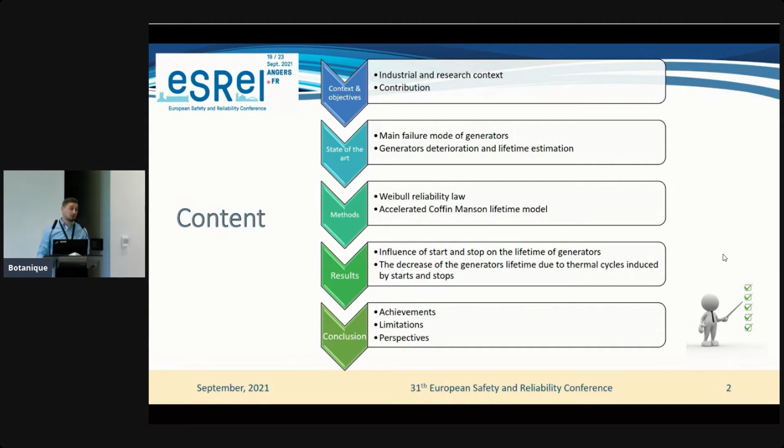So the industrial context: why we study the effect of cycling. Due to the deregulation of the energy market in Europe, the hydropower equipment started to have an increased number of starts and stops, because renewable energy had to be integrated on the electrical network. So the operators need to adapt to the new operating constraints. This might lead to reduced lifetime of the equipment and, in the end, additional costs that need to be evaluated.

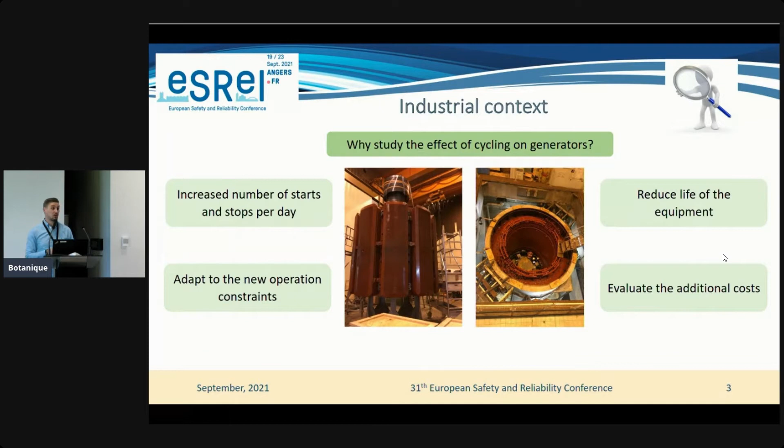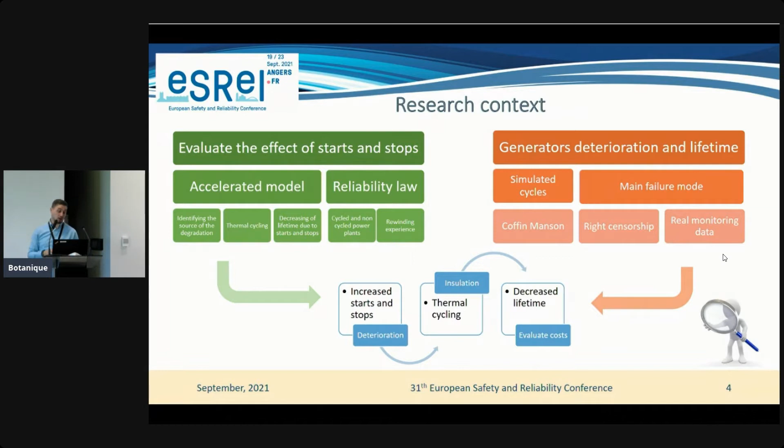A few words about the contribution. We evaluate the effect of start and stop. First of all, we analyze all the subcomponents of generators, and then we identify the degradation phenomena. That was the first step, and then we propose two studies to estimate the decrease in lifetime. We have two categories, and we use the rewinding experience with right censorship. We try to model it after with an accelerated lifetime model, and we do two types of simulation.

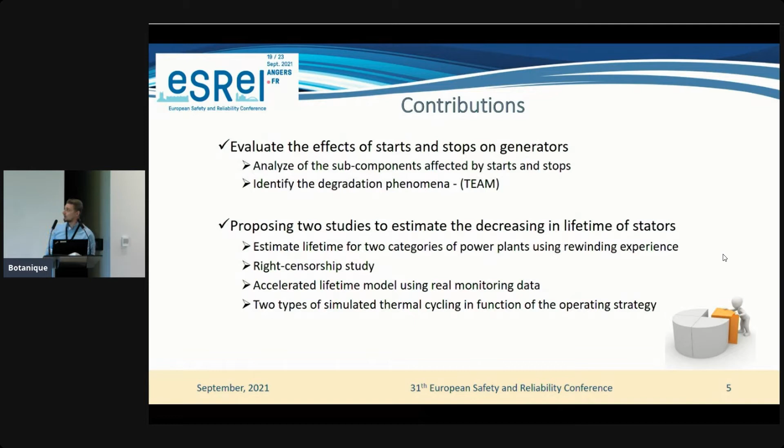So briefly, the two methods. First, the reliability law. We use real data on rewinding years, and we also use right censorship. We will discuss after exactly what right censorship means. And then we estimate the lifetime of two types of hydropower plants, which we call cycled and non-cycled hydropower plants.

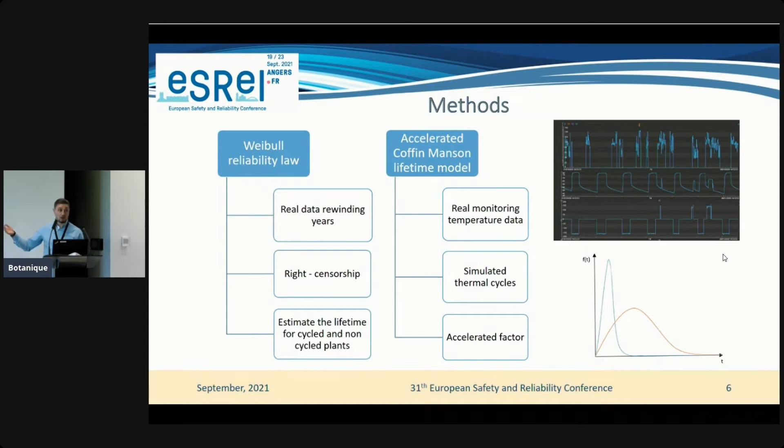So once we see the effect of the start and stop, we try to model it, and we model it with real monitoring temperature data. We simulate some thermal cycles, and in the end, we estimate an acceleration factor. In the next slides, I will explain exactly the two types of methods.

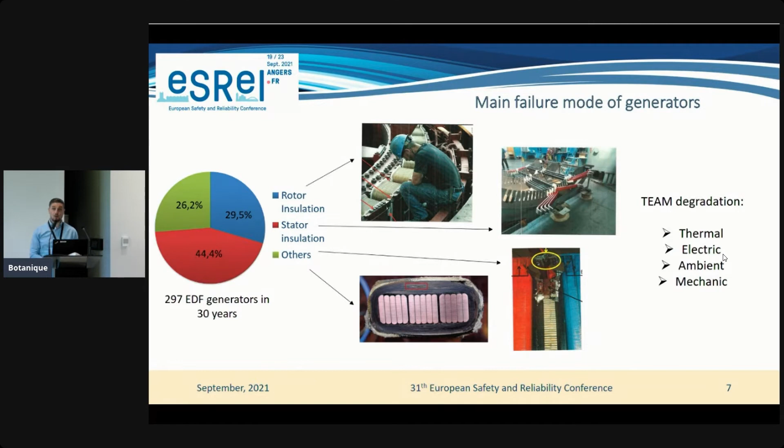So in the beginning, we did a study on almost 300 EDF generators over the past 30 years, and we saw that the main defaults are related to stator insulation. Half of them are related to stator insulation. There are also defaults related to rotor insulation and other types of defaults. We call this TEAM degradation, meaning thermal, electric, ambient, and mechanical. For the stator insulation, the thermal degradation is the most important one, and we try to model it.

So with the first method, we use a Weibull reliability law with two parameters, alpha and beta, and we make two groups. The first group is called low cycle plants, where we have run-of-river plants, with an average of one cycle or less per day. In the second group, we have the high cycle plants, with an average of 2 or more cycles per day. This is the average over the whole life, not what they do every day. Sometimes the high cycle plants do more than 2 cycles per day. So we have almost 300 generators that are low cycled, and almost 43 high cycled plants.

Why do we use right censorship? Because there are generators that are still functioning now. There are hydropower plants that were commissioned in the early 20th century, so they are more than 100 years old. Some of them were replaced, some of them are still functioning. So we use right censorship to model it.

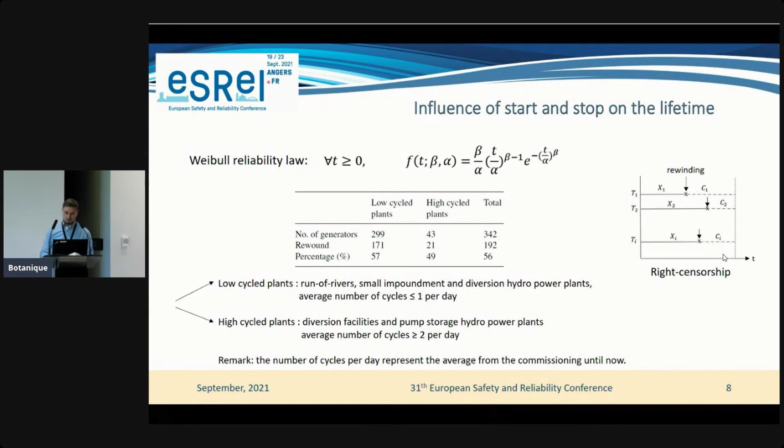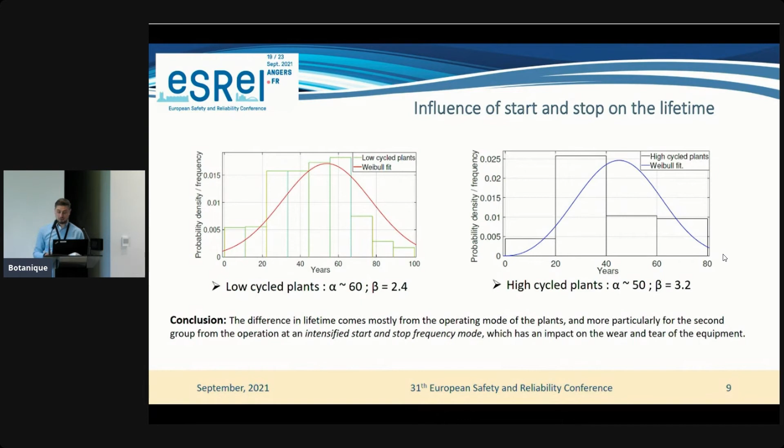So once we saw this effect, we tried to model it, and we modeled it with an accelerated lifetime model. It's called the Coffin-Manson model. Basically, we have the lifetime, and the lifetime is divided by this accelerated factor that is estimated, and we have the average temperature, the amplitude, and the cycling frequency.

So in accelerated lifetime models, we have something that is used like T0, delta T0 and F0. We call it the basic level, so it's for one cycle per day. And we have the accelerated cycles like T1, delta T1, and F1 for the accelerated cycles, meaning 2, 3, 4, and so forth, cycles per day.

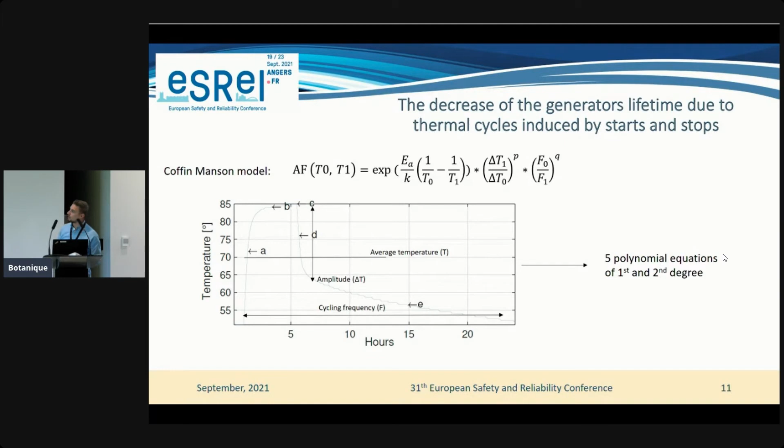We can see the cycles are very different, and because of that, we tried to model them to make them easier for us to study. We took a normal cycle, a base cycle we call it, one cycle per day, and we made a decomposition into 5 polynomial equations. So we see the 5 stages of a cycle, A, B, C, D, and E, with the starting to work, then a constant temperature, and then starting to descend for the cooling part of the generator. So we simulated 2 types of cycles depending on the strategy used.

The first strategy, we simulated pump temperature cycles with operating time equal to cooling time. What does that mean? We have a cycle per day, in 24 hours. So 12 hours is the time of functioning, and the other 12 hours is the cooling time. We simulated up to 7 cycles per day here. And we saw that the average temperature doesn't change a lot, between 72 and 75. The amplitude is between 20 and 30, and the cycles between 2 and 7.

On the other side, we simulated pump temperature cycles with fixed operating time and a cooling time that decreases with cycles. What does that mean? We have a cycle per day, and we know the generator will function for 3 hours and a half, and then we simulate up to 5 cycles per day. So we saw that if the generator works with a fixed time that is bigger than the cooling time, the average temperature goes from 60 to 80, meaning there's a high influence of the average temperature. The amplitude is the same as in the first simulation, and the cycles are up to 5 per day. So these are the two types of simulation. We see the difference in average temperature, the amplitude is the same, and the frequency up to 5 is the same.

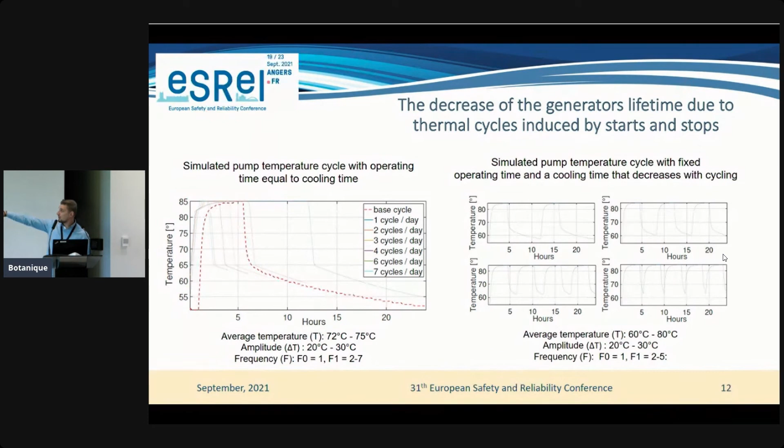And what we observe on the acceleration factor: for the first simulation, when the time of functioning is equal to the cooling time, for 7 cycles per day we can reduce the lifetime of a generator by up to 20%. On the second simulation, with 5 cycles per day, where the average temperature has a big influence, the reduced lifetime can be up to 75%. So it's a big difference between the two simulations, meaning there's a difference between the two types of strategy used.

Some conclusions: we saw the lifetime decreases with increasing cycles, because for an acceleration factor, if the value is less than 1, the lifetime will increase. If the value is greater than 1, it will decrease. So we saw in both cases that lifetime is decreasing. So this is a predictive model and shows how it could capture the effect of different cycle modes on lifetime, rather than fitting real data to estimate a lifetime reduction on a real cycle. And depending on the strategy used, we have different values for the reduced lifetime, and this is mainly due to the average temperature.

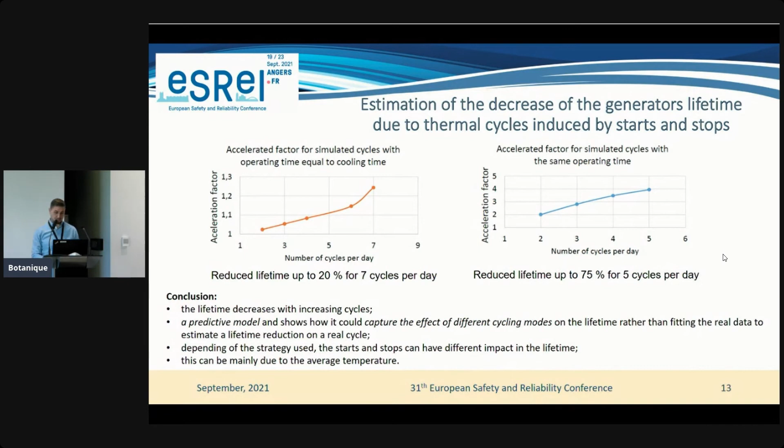So in conclusion, what are the achievements? We saw that thermal deterioration due to start and stop on the stator is very important, and it's the main cause of deterioration. Power plants with more cycles per day have lower life expectancy. We saw that from both simulations and from the first method we used. And depending on the strategy, we have different values of lifetime.

What are the limitations and perspectives? We had little scientific information on the wear and tear of generators related to start and stop. This is important because deterioration was studied, but related to start and stop it wasn't studied until now. Data availability of the rewinding gears: we have history data for more than 100 years, but the quality of the data is also very important, so we also focused on that point. Depending on different strategies, we can influence the lifetime of a generator. And I've studied only the pump functioning mode. Pump storage power plants also have a turbine mode, and this needs to be studied as a perspective.